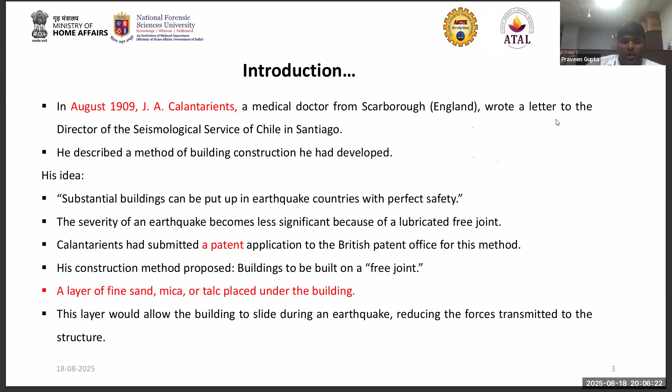So first, isolation was started earlier in 1909 by J.A. Calantarients. He was a medical doctor, but he had the thought that if a building is separated from its base, it can be more resistant to earthquakes. So he filed a patent, and it was a British patent. After filing the British patent, the idea was more elaborated, and we have incorporated isolation bearings nowadays. So this idea was by Dr. J. Calantarients.

If you look at the history of seismic isolation, in 1885 Japan had already started using wooden structures because there were a lot of casualties happening in Japan. So they started providing a sand layer over the base so they could protect their structures. Then in 1909, we saw that Dr. Calantarients provided the first patent for seismic isolation. Later on, New Zealand also worked on it, Italy also worked, and the USA also worked on base isolation.

And in 1975, New Zealand invented the lead rubber bearing, a very advanced isolation bearing that is being used nowadays. Later on, more studies were done and more isolation bearings were developed. Nowadays we also have smart isolations provided with shape memory alloys.

The objective of isolation is to protect the structure from earthquakes. But there are certain limitations. Whenever you use isolation bearings, it reduces the earthquake effect, but at the same time you have a problem of larger displacement in the building.

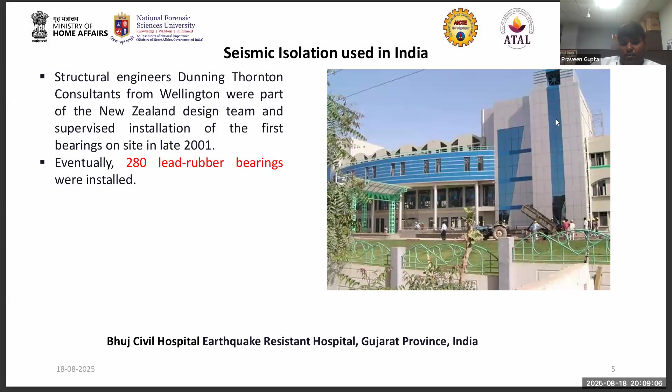First, seismic isolation bearings are now being used. The first building incorporating this after the Bhuj earthquake in Gujarat was the Bhuj Civil Hospital, in which 280 lead rubber bearings have been installed, and now it has been protected from seismic activities.

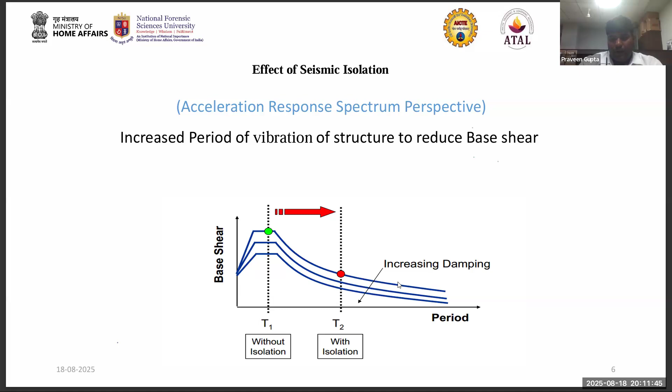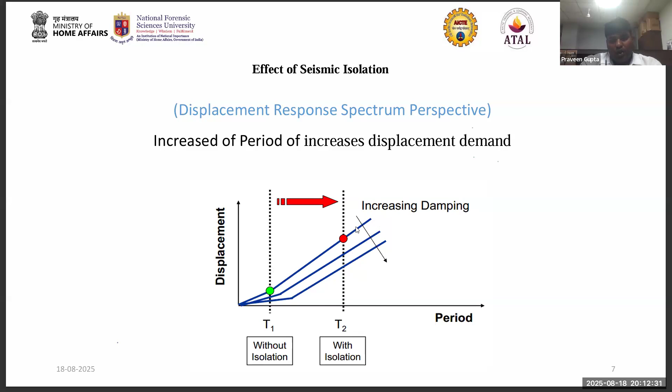If you see this diagram, from the displacement response spectrum perspective, by that time if you are increasing the time period, what is the main problem in isolation? You will have an increased value of displacement. So that is the biggest problem. How can you overcome this problem? By adding additional damping to the structure, you can reduce the increased displacement also. So by increasing the time period, you can have lesser base shear, and by adding more damping into the structure, you can reduce the displacement of the building also.

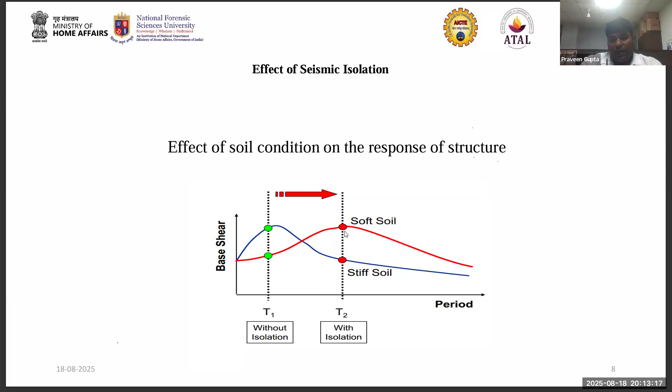If you see the effect of soil condition on the structure, consider two types of buildings, one without isolation and another with isolation. Without isolation, soft soil has lesser response, but stiff soil has more response, and soft soil has less response. But with the isolation bearing, what happens is that soft soil has a larger response than stiff soil. So this is the effect.

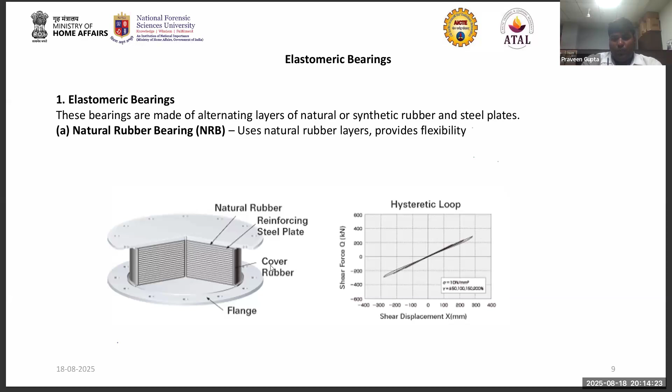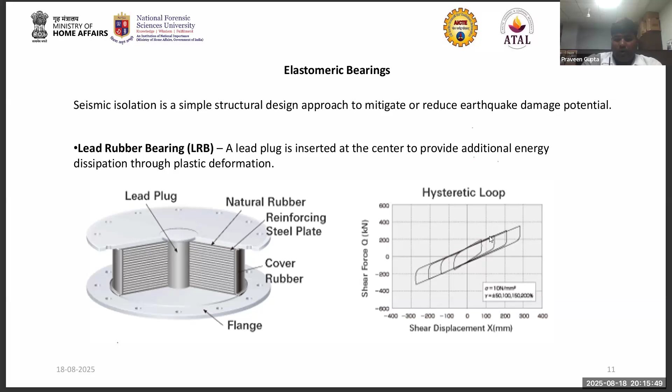Another one is the lead rubber bearing. This is also a kind of rubber bearing in which a lead plug is inserted, and this lead plug dissipates the energy, similar to the HDRB bearing. But the role of the lead plug is to dissipate the energy and provide the heating element to this material. The loop of this is a kind of bilinear behavior, and by this bilinear behavior, the bearing reduces the response of the structure.

Another type is the sliding bearings. Sliding bearings allow relative displacement between the structure and substructure through the sliding surface. Whenever you have friction, there will be some kind of energy dissipation. This particular bearing is based on Coulomb friction, in which the energy is dissipated by friction.

So what we are doing is providing different types of sliding bearings, in which we have friction material that provides the friction between two surfaces. There are four types of sliding bearing: flat sliding bearing, friction pendulum sliding bearing, double concave friction pendulum bearing, and triple concave friction bearing. This is advanced bearing, not in proper common use, but for research purposes it is widely used by many researchers.

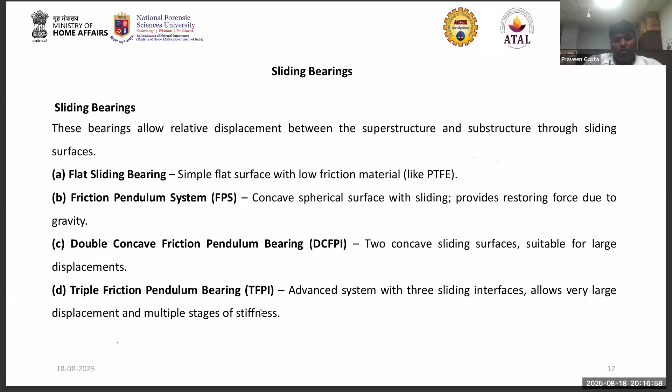If you see the flat sliding bearing, it is a simple flat surface with a low friction material like PTFE. The force deformation behavior of this bearing is a kind of bilinear and non-linear behavior, but you will find there is a permanent deformation into this bearing. When this bearing has some displacement, it does not regain its original position. That is the biggest problem of this sliding bearing - permanent deformation whenever extreme loading occurs into the structure.

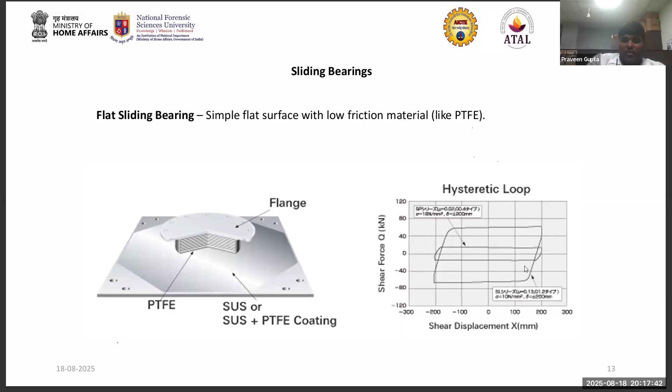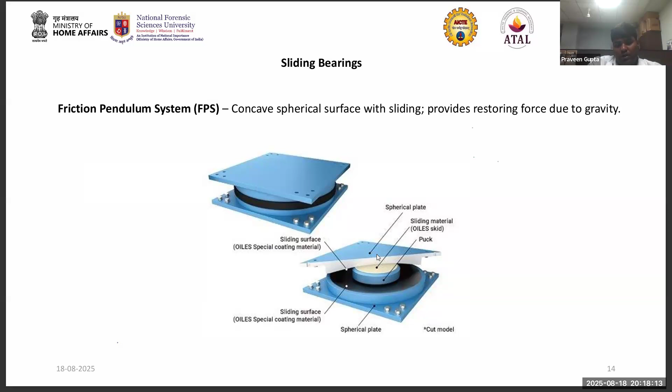That's why we have a different type, the friction pendulum system, in which the surface is supported on a pendulum, and this pendulum slides over between this ring. Due to this, it restores the deformation into the structure. This is the advantage over the simple sliding bearing - with the friction pendulum system, it regains its original position.

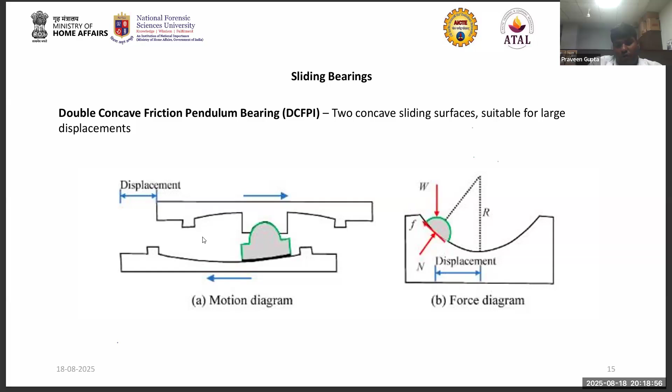If you see the double concave friction pendulum bearing, this has two concave sliding surfaces suitable for large displacement. Whenever you have extreme loading, this type of setup is prepared for our double concave surface friction pendulum bearing. This particular slider will move the pendulum, and the radius of the pendulum will be designed based on the loading. This is called the double concave friction pendulum system.

If you see the triple concave, this has an additional pendulum provided, so that it can move more displacement, and the structure can be protected. When the earthquake passes over this structure, it will regain its original position. That's why it is more advantageous than the double concave friction pendulum bearing. Triple concave has very large displacement, and it also regains its original position.

Another bearing is called the SMA bearing, an advanced type of bearing. Whenever you provide any kind of isolation bearing, as I have told you, it has deformations, and those deformations after the earthquake may be permanent. To improve that deformation, shape memory alloy can be provided, built into the isolator, so that it can improve its capacity of recentering.

The basic property of shape memory alloy is that it provides flexibility, has large energy dissipation, and the most advantageous property of SMA is the recentering ability. Whenever you provide SMA into the bearing, it has zero residual displacement. That's why SMA bearing is quite popular among researchers - it is a combination of lead rubber bearing with SMA bars or SMA wires, friction pendulum with SMA wires, and it enhances the recentering capability after strong earthquakes.

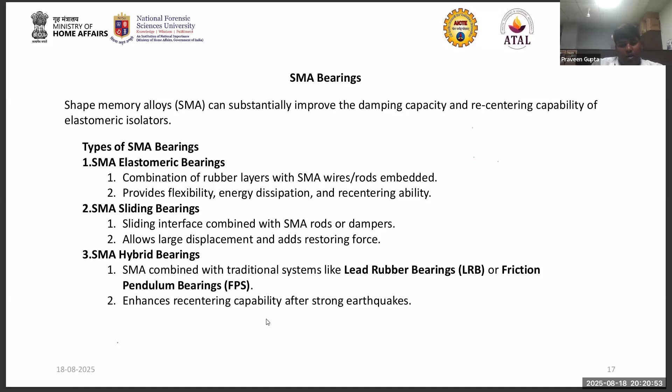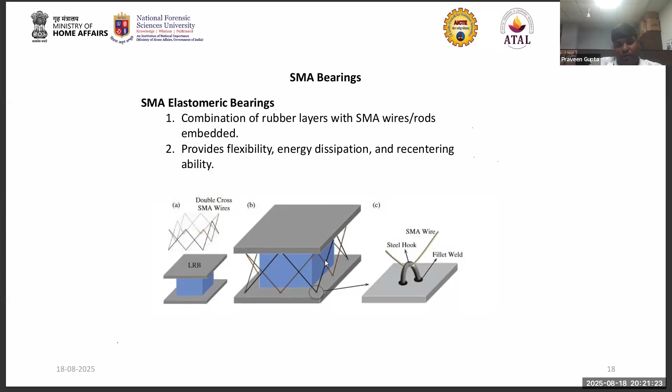If you see this particular SMA bearing, the cross wires are SMA wires that have been provided to protect it from permanent deformation. Whenever an earthquake comes, the isolation bearing will deform, but these SMA wires will activate and provide recentering properties, so that permanent deformation will not occur in this type of bearing.

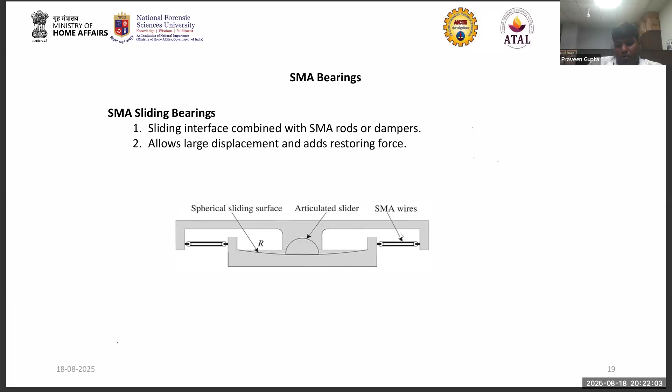This is the sliding bearing, a friction pendulum system, in which an SMA wire has been arranged such that whenever the slider moves to and fro through the pendulum radius, the SMA wire will activate and try to attract it back towards the friction pendulum system. So it will not have permanent deformation due to these wires, and it will also dissipate energy during the earthquake.

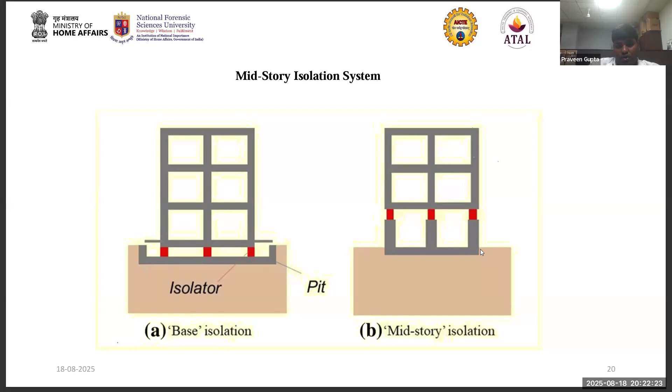Sometimes we provide the isolation bearing at the base, but you can also provide it at the mid level. Many researchers have provided base isolation, mid isolation, and have also combined base isolation and mid isolation. We will discuss this in the next slide.

Mid-story isolation is a structural engineering technique where seismic isolators are installed at an intermediate floor level, isolating the upper portion of the structure from the lower portion, allowing each part to respond differently to ground motion. During the earthquake, the lower story anchored directly to the ground experiences the majority of the energy, while the isolated upper story moves independently with significantly reduced vibrations.

So the role of isolation is to decouple the structure - the lower portion decouples from the upper portion. The upper portion moves to and fro, and the acceleration will not transmit to the upper level.

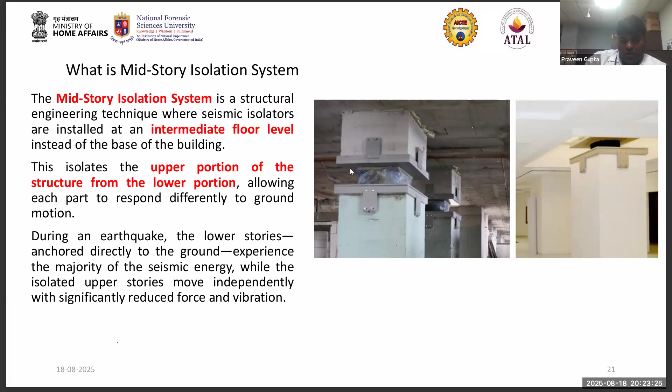This is quite useful for high damping rubber bearing. High damping rubber bearing, as we already discussed, provides additional damping in the form of viscous damping. This particular high damping rubber is made of alternate layers of steel and rubber, and it also has vertical stability - meaning whatever vertical load comes on the structure, it will resist that, and the horizontal stiffness is provided by the steel and rubber plates.

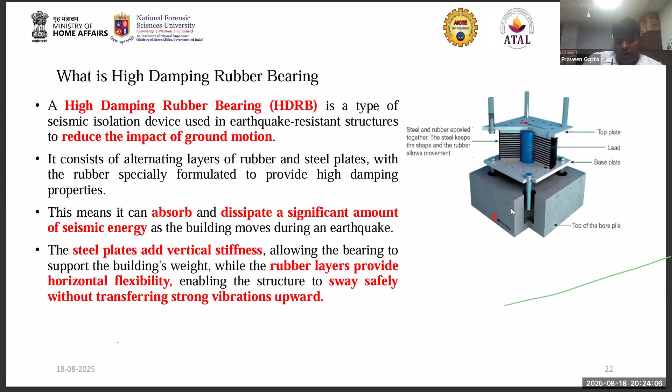If you see the modeling of high damping rubber bearing, first you have to choose the target time period of the isolation. Let's say your building is 0.5 second, or 0.8 second - for what time period of the structure you are going to design your isolation bearing. You have to decide this, because time period is nothing but the reciprocal of frequency.

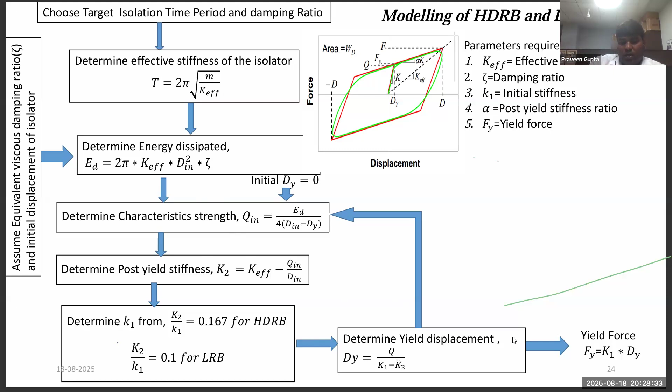Initially you have to provide dy as 0, and then you can calculate the yield displacement. This procedure will be repeated because you will not get the direct value of Fy. You have to give many iterations, until you get repeated values of the displacement and yield force. This is the iterative method to model a high damping rubber bearing and lead rubber bearing.

Similarly, this formula can be used if you are modeling the friction pendulum system. You have to determine the radius of the pendulum using T equals 2 pi under root R by G, where R is the radius of the pendulum in which your slider will be moving. This is the formula to determine R. Once you have R, you can find the K effective, which is nothing but W by R, where W is the weight on the isolator which you are going to support.

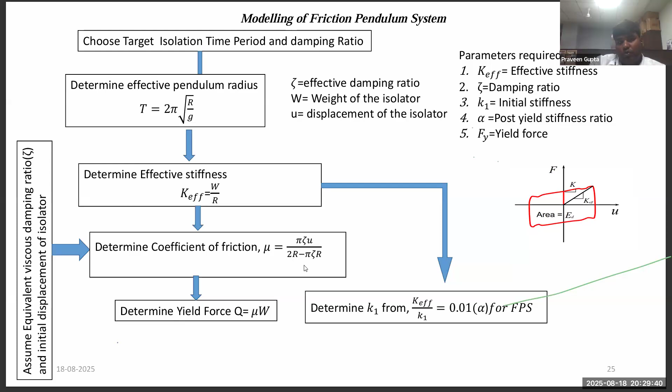You can use this particular formula to determine the coefficient of friction. After determining this, you will have the values K1, K effective, and the yield force. You can provide these in either SAP2000 or ETABS to model any kind of isolation bearing.

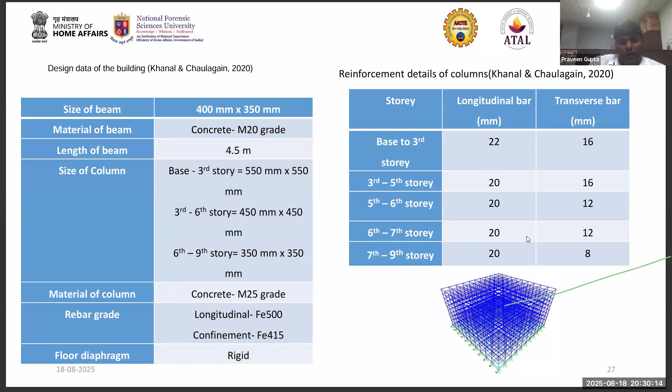This is the case study which we have done for the regular building. We have selected this particular regular building with this size of beam, this grade of concrete, length of the beam, different sizes of column provided, grade of concrete, rebar, and a rigid floor diaphragm. We have modeled this building with these amounts of reinforcement, and these ground motions have been selected and determined.

This ground motion has been selected and determined from the PEER ground motion database, a website where you can download real-time earthquake data. Whenever you perform any kind of non-linear time history analysis, you have to record the real ground motion data, and this data can be scaled to your seismic zone. Otherwise, if you want to capture the real effect of that particular ground motion, you can use unscaled ground motion. It depends on what kind of study you are doing - many researchers use unscaled ground motion, many use scaled ground motion. This kind of data can be downloaded from the PEER ground motion database.

If you look at this particular ground motion, 8 ground motions have been used in this study, and there is a variety of ground motion because these ground motions have different PGA, different PGV, and if you see this acceleration ratio, Vmax upon Amax. PGA stands for peak ground acceleration - what was the peak ground acceleration of that particular ground motion, and at that time what was the peak ground velocity. Whenever you download the ground motion, you will not have an idea what kind of ground motion we are having.

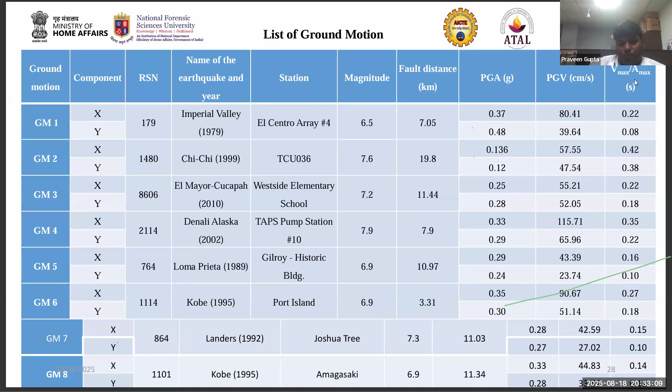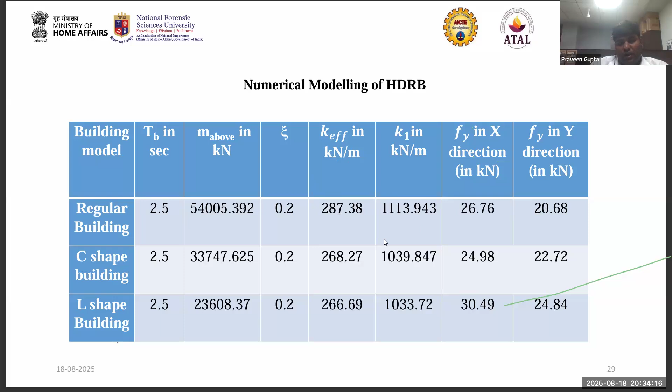Target time period 2.5 seconds. What was the mass on that particular isolator? What damping ratio have we assumed? We have assumed 20% damping, so we have taken 0.2. K effective has been determined using the formula T b equals 2 pi under root m by K effective, and K1 using that formula, and Fy using those formulas. Then we have this kind of information which we can incorporate in our software, so that we can model the isolation bearings.

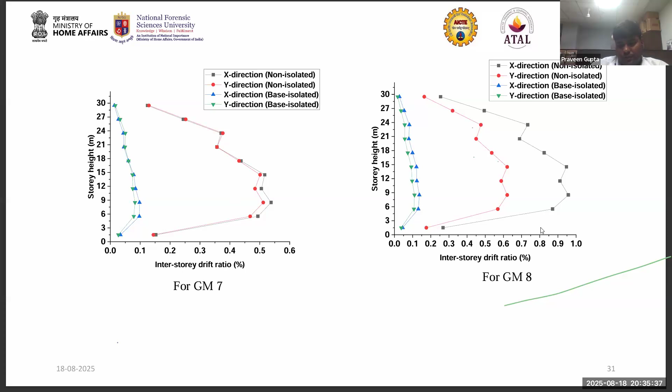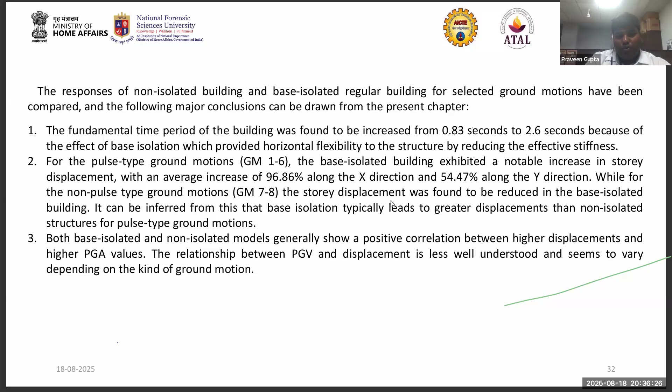In this particular study, the ground motion has been classified and it has been observed that the average increase in story displacement - story displacement, I have already told, may increase, but if you see, the drift can be significantly reduced.

In this particular study, the higher PGV value, peak ground velocity value, is generally correlated with higher inter-drift ratio in non-isolated models. However, regardless of PGV, low values of IDR were found in the base isolated model, indicating the effectiveness of base isolation in controlling inter-story drift ratio. Additionally, it was discovered that higher PGV values generally correlated with higher inter-story drift ratio in non-isolated model.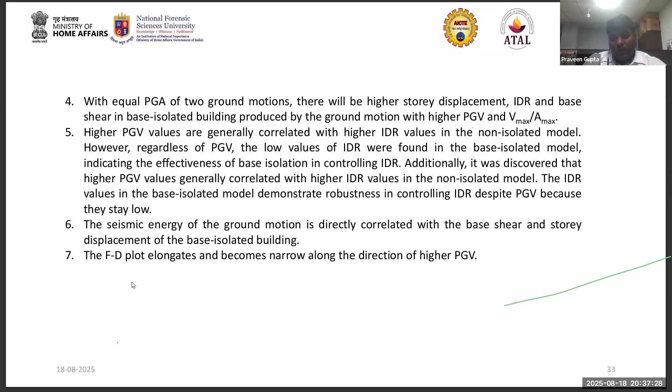The seismic energy of ground motion is directly correlated with the base shear and story displacement, and force deformation behavior is also elongated at higher PGV, because whenever you have a high pulse of velocity, your force deformation behavior means your displacement will be higher. That's why the force deformation elongates.

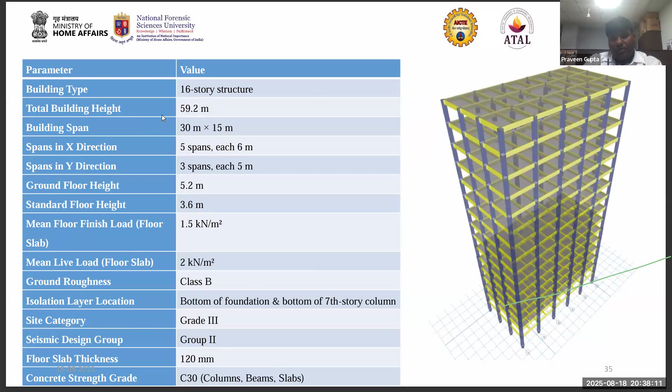So we have done another study, which is the case study for inter-story isolated building. We selected a building from literature and modeled a 16-story building. These are the properties of this particular 16-story building, categorized as a Class B building, with a grade of concrete C30, and these are the live loads and dead loads provided into the building. First the building was designed as per IS code, and then the ground motion has been applied.

This particular study has four models. The first model was without any kind of device. The second model is the base isolated model, in which we provided the isolation bearing at the base. The third model is one in which we have not provided isolation at the base, but at an intermediate level into the building. And this particular one is the new staggered isolation bearing, in which we combined base isolation as well as inter-story isolation.

So we provided four types of structures: the first without any kind of isolation, the second with base isolation, the third with mid-story isolation, and the fourth is the combination of mid-story isolation and base isolation. We investigated the effect on these types of buildings, and which combination is more suitable for protecting the structure from earthquake.

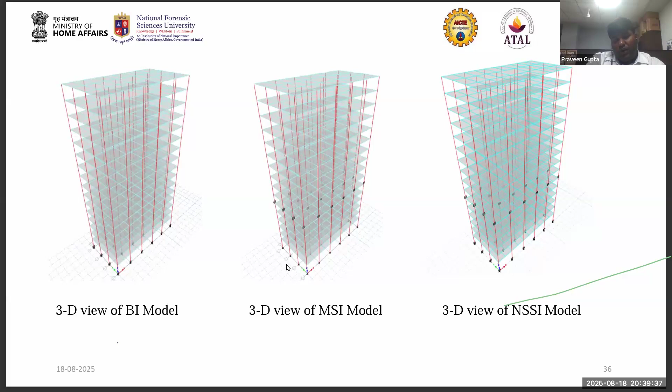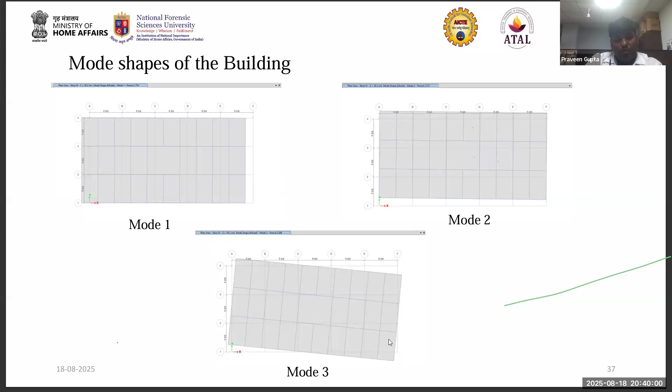When the studies were done, it was observed to have a very mixed type of response. So first we did the modal analysis to determine the mode shape of the structure. The first two modes were translational, and the third mode came as torsional. These are the mode shapes of the building obtained using modal analysis.

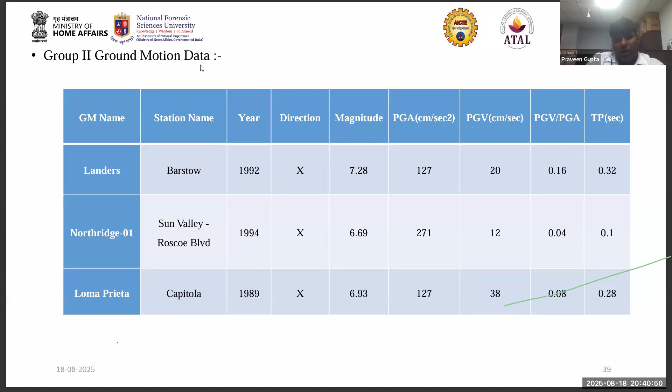These are the ground motions. We categorized our ground motions depending upon the peak ground velocity, since peak ground velocity is the main parameter which can significantly affect the response of the structure. We have two ranges: one ranging from 40 centimeters to 130 centimeters per second, and another group less than 40 centimeters per second. These ground motions were categorized as group 1 and group 2, and downloaded from the PEER database, selected from the literature based on peak ground velocity.

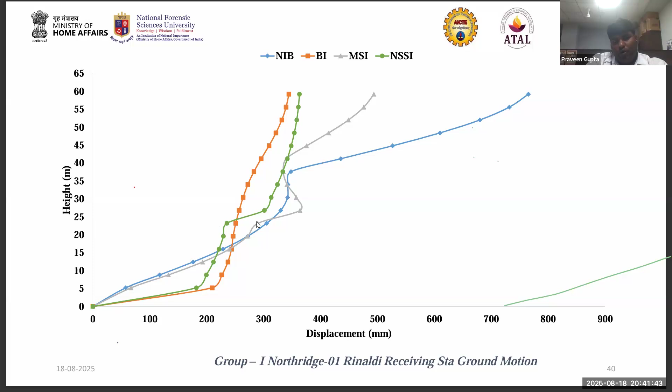If you see this particular graph, it increases suddenly, and this is because at this level the isolation has been provided, and after that the response has been reduced because the inter-story drift ratio is less.

Similarly, if you see this particular graph for drift, the drift is coming less. But at story level 25, there is a sudden displacement. This sudden displacement shows the displacement of the isolator, not the displacement of the building, because the building is connected to the isolator, so that interstory drift ratio is not considered since it is the displacement of the isolator. That's why this graph suddenly jumps - these particular values are coming from the isolation level, and this is the actual drift ratio obtained.

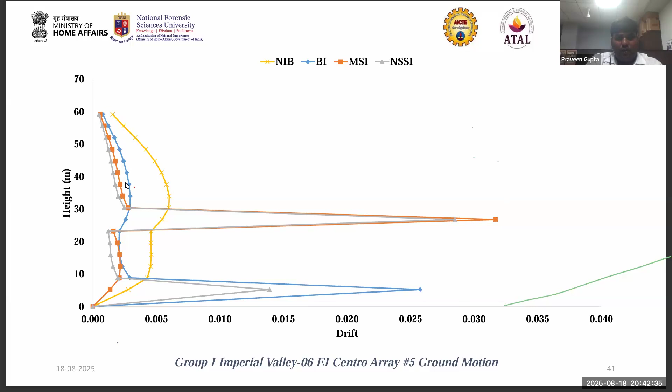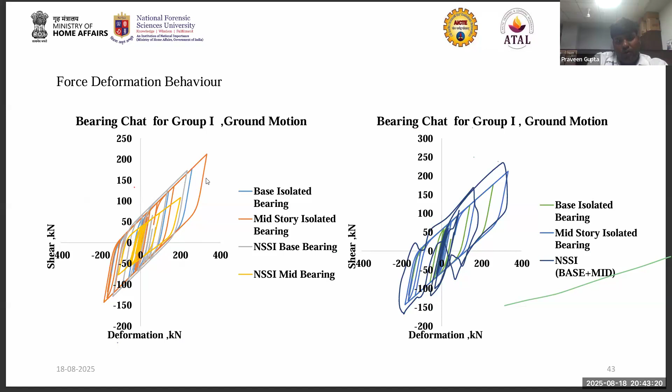It has been observed that the mid-story isolation has been found suitable for energy dissipation for this particular ground motion.

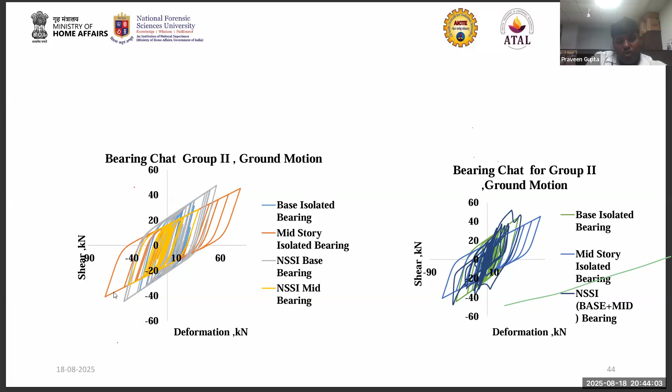Similarly, if you see the group 2 ground motions, you will see that the NSSI model has a lesser effect because we have provided two additional dampers, one at mid-story level and one at base level, so the damping has been increased. That's why the NSSI model has a lesser loop. But the orange graph shows a larger loop because the mid-story has only a single damping, so it dissipated more energy.

So if you look at this, and want to select which kind of isolation bearing or system is more suitable while deciding between base isolation or mid-story isolation, there are various parameters to consider: drift, story displacement, and energy dissipation.

So this shows mixed kinds of behavior. In some cases, story displacement and story shear come out good. But for NSSI, it shows a great effect when the ground motion has a peak ground velocity ranging from 40 centimeters per second to 130 centimeters per second. If the peak ground velocity is less than 40 centimeters, either mid-story isolation or base isolation can be used, both giving similar results. So this type of study has been done by providing isolation bearings.

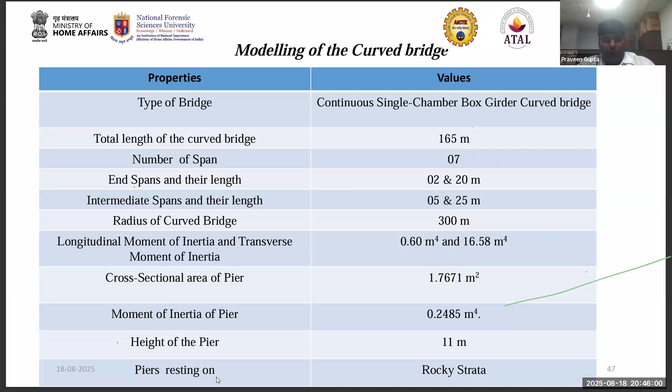Case study for isolated curved bridges. We also modeled a curved bridge with isolation bearings provided. This curved bridge was a single chamber box girder bridge with a total length of 165 meters. The total number of spans was 7, with end spans of 20 meters length, and 5 intermediate spans of 25 meters length. The radius of curvature of the bridge was 300 meters, and the moment of inertia and cross-section pier values were taken as shown. The piers were resting on rocky strata, so we took a fixed base during modeling of the curve.

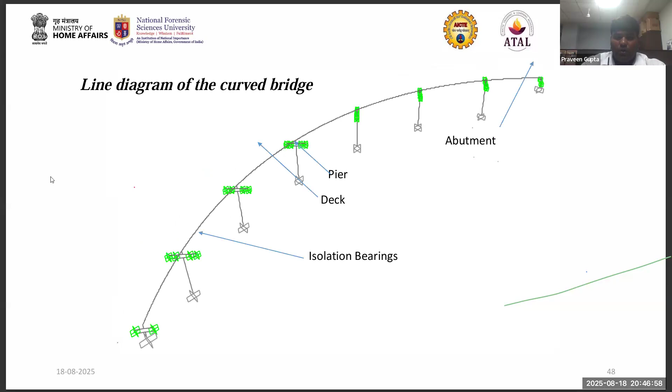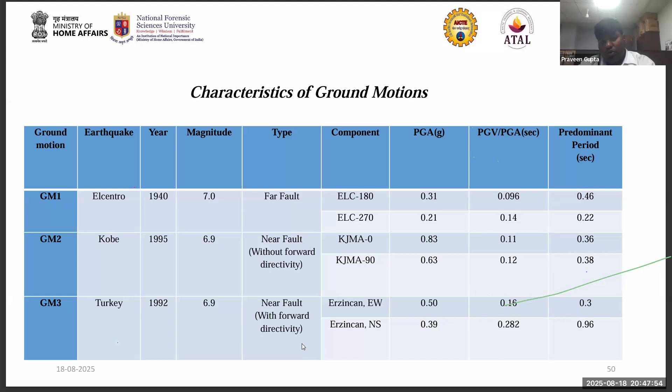That's why after a sudden decrease it started to increase, meaning there are some kind of optimizations in this particular isolation bearing. Based on that, we can have an idea that we can fix the time period and fix the damping ratio up to 20%.

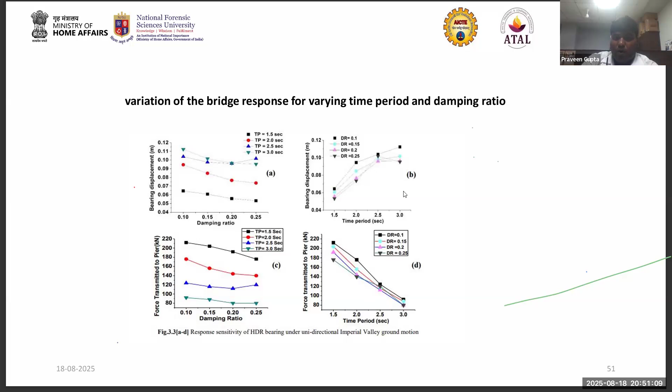So your aim is not only to protect the structure from the forces, you have to take the displacement criteria also. In order to reduce the forces, as a structural engineer, you can reduce the forces, but at the same time you have to also protect your structure from the displacement. So in that case, you have to do some optimizations while designing the isolation bearings.

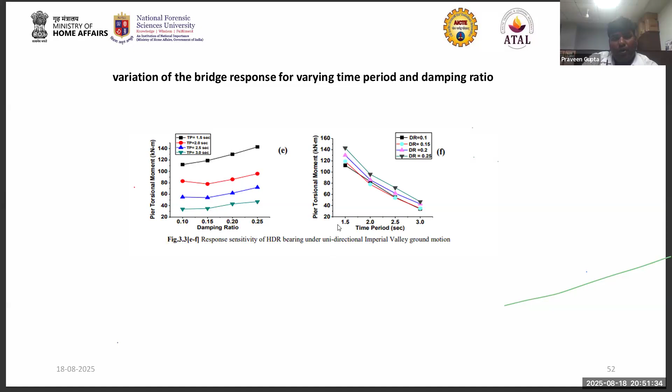We have also done this because it is a curved bridge, so there might be a torsional moment in the bridges. Torsional moment is also getting reduced up to a certain level, up to a certain damping, and thereafter it increases. So the response of the bridges certainly depends upon the time period and damping ratio of the isolation bearings.

This is the effect of bidirectional loading. If you download the ground motion, you will find six directions: you have an x direction value, a y direction value, meaning two translation values, and one vertical direction value. At the same time, you will find the rotational component of the ground motion, because we have 6 degrees of freedom, so we will have six values of the ground motion.

But how you are going to apply the ground motion is very important - whether you are going to provide unidirectional, bidirectional, or tridirectional ground motion. Our code has already given the idea that if you are doing any kind of advanced analysis and the structure is more vulnerable to other ground motion directions also, you can provide bidirectional and tridirectional ground motions also.

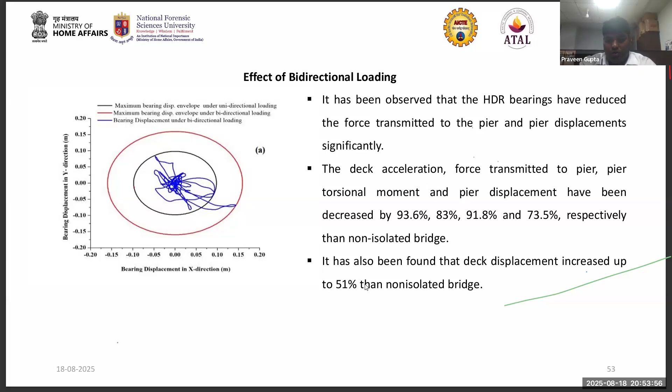And if you see, the high damping rubber bearing significantly reduces the force transmitted to the pier, and the deck displacement has been increased, as we have already discussed. If you are providing the isolator, there will be a problem of increase in the deck displacement or inter-story displacement in the buildings.

We have this code, seismic isolation, as per IS 1893. It is a very small code, around 10 to 8 pages, which I have already covered. These equations have been given over there, and you can refer to this particular code whenever you design any kind of isolation bearings.

While designing lead rubber bearings, there is a limitation of this particular code, in that it only covers lead rubber bearing or high damping rubber bearing. Meaning, you can design only rubber bearing, and you can model this particular bearing as a bilinear model, which I have already covered in the earlier slide.

Some software demonstration we can do over here, and these were the references.

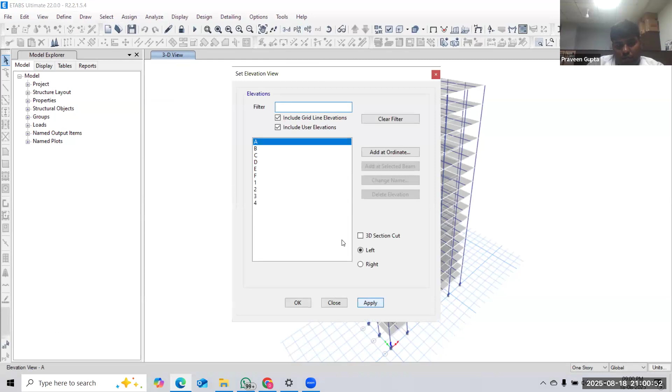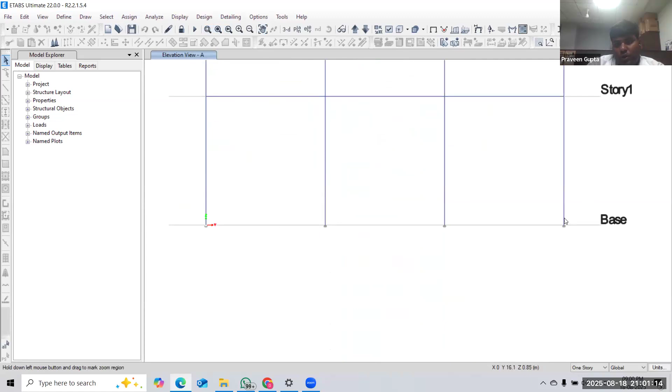So this is the joint base, and here we can have an isolation bearing. So here we can provide the joint, and we can provide the isolation bearing.

Okay, so first you have to determine the self weight of the building. Self weight of the building includes dead load and some percentage of live load that you have to incorporate. So how do you calculate the dead load and live load?

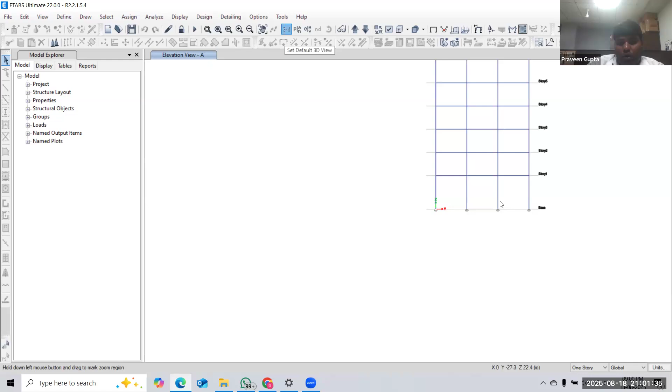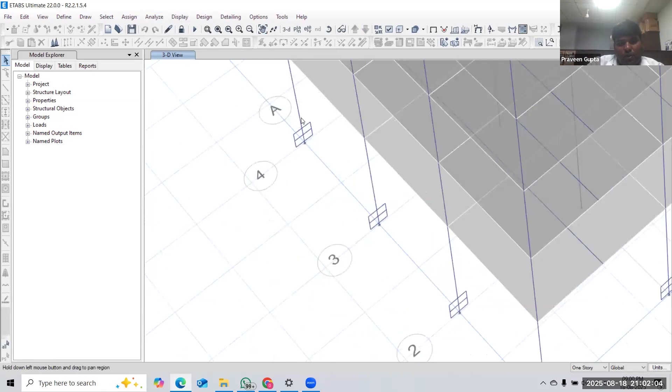First, you have to provide the simply supported joint over all the supports, and do the simple analysis. If you go to the set load, you have to only perform the dead load analysis, or you can have a combination of dead load plus live load. Based on that, whatever reactions are coming, you can calculate those reactions in z direction, and this will be the vertical load coming on the structure.

Once you calculate the load on the structure, you have an idea that this is the mass of the structure. Then you can calculate the value of K effective. We have discussed T equals 2 pi under root m by k - this is the simple formula by which you can calculate the K effective.

So K effective determines which kind of isolator we are going to provide. In order to do that, we have to determine the value of K effective, which can be determined by T equals 2 pi under root m by K, where T is the assumed value - meaning you are targeting a 2.5 second or 3-second building. So by using that formula, you can determine the value of K effective, since T is known to you and M is known to you.

If you are putting the value of M, what is M? If you are providing the fixed support, you will have an idea what kind of vertical load is coming on the structure, and that will be in kilonewton. Then if you divide it by g, you will get the mass of the building. Then you can calculate the value of K effective, and otherwise you can directly put the value of w, which is coming in kilonewton. Then you will have an idea about K effective. After getting K effective, you can shift the time period of the structure.

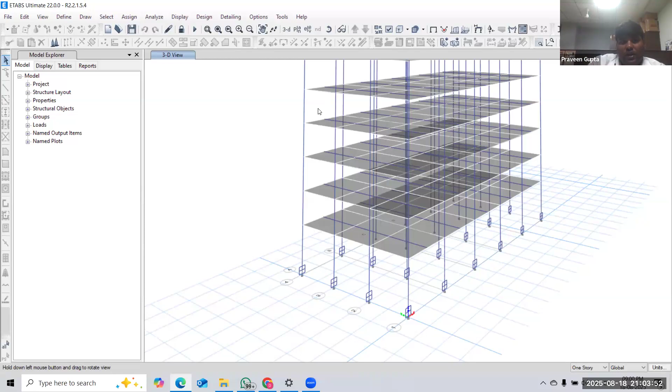So this is the second step, and you have calculated the K effective. Now if you put this particular K effective, you will have an idea that my building has shifted from 0.8 second to, let us say, 2.5 second. So how are you going to provide this K effective? First you have to assign this particular isolation bearing into the system.

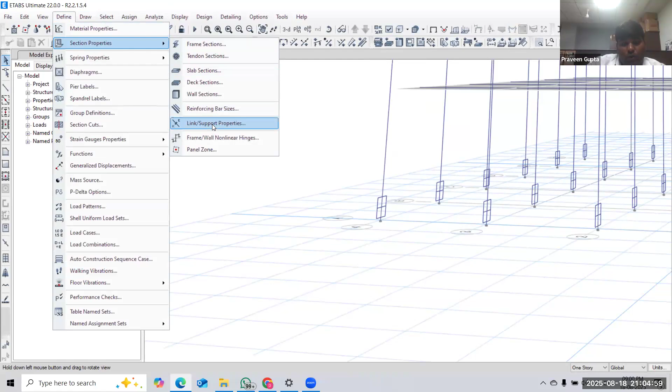So if you see, we have already provided the isolation bearing over here. If you click on this, this is my link property. If you click here, this is my isolation bearing in which I have provided HDRB4. If I would like to see the values of this, I will go for Define Section Property, and in section property, link support property. The link support property, basically we provide the link as an isolator. If you click on this link support property, there is a high damping rubber bearing provided over here.

Let us say I'm just adding one new property, for example. So how are we going to fix this? If you see here, there are so many devices available: damper, damper bilinear, damper friction, spring gap, hook, multilinear elastic, and so on. So which one are we going to select? Either you can use the high damping rubber bearing isolator directly, or you can use the Plastic Wen. Plastic Wen is the idea in which you have already done the bilinear modeling.

So if you see the directions, the isolation bearing has three directions: U1, U2, U3. U1 is the vertical direction, U2 and U3 are the horizontal directions. So what is this stiffness? This stiffness is nothing but the flexibility of the isolation bearing, flexibility of your building. So in which direction are you going to provide the flexibility? This is not your vertical stiffness, this is your horizontal stiffness. So you have to click on the directional property U2 and U3.

If you click here, you will find data: effective damping and effective stiffness. So effective stiffness is what you have calculated using K, T equals 2 pi under root M by K. K is the K effective, which you will put over here. And damping you have to assume - let's say you want to do many iterations, so first you take 10% damping, 15% damping, 20% damping, and so on. You can put your damping ratio here.

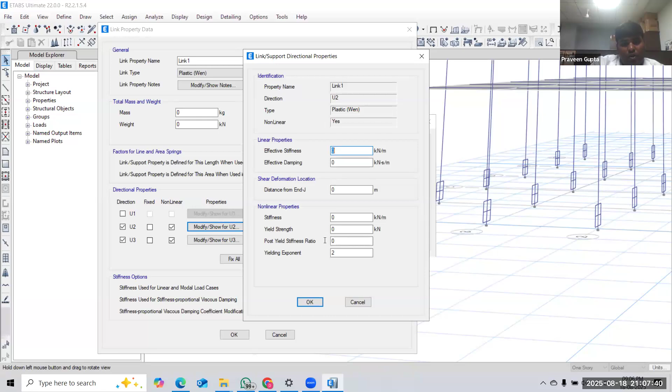After putting this, you will have the property in all the directions. The other directions you have to keep fixed. So you have to fix all the other directions, because I am providing my flexibility in the horizontal directions. Horizontal can be X direction, horizontal can be Y direction. So this directional property is very important while designing any kind of isolator.

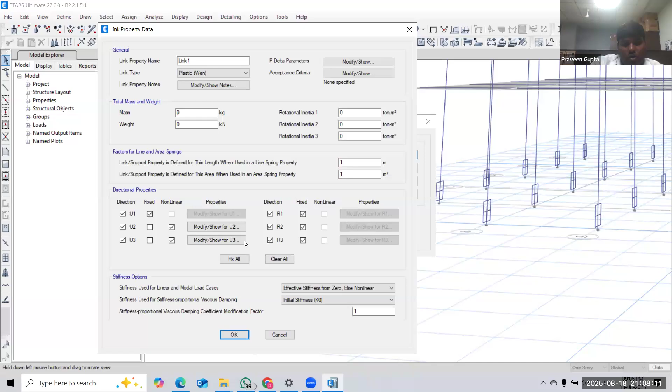So you have to put this - if you see my properties, I have already provided over here, so you can check. I have provided my effective stiffness 302.025, which I have calculated from the formula T equal to 2 pi under root m by K. I have assumed the damping ratio 0.15. The stiffness I have calculated, that is your initial stiffness K1, and the yield strength is K1 into dy, which I have calculated from the equations we discussed, and this is the post yield stiffness ratio. Here you can put the post yield stiffness ratio 0.167 or 0.1, and then you will have these properties. This is called the nonlinear property of the system.

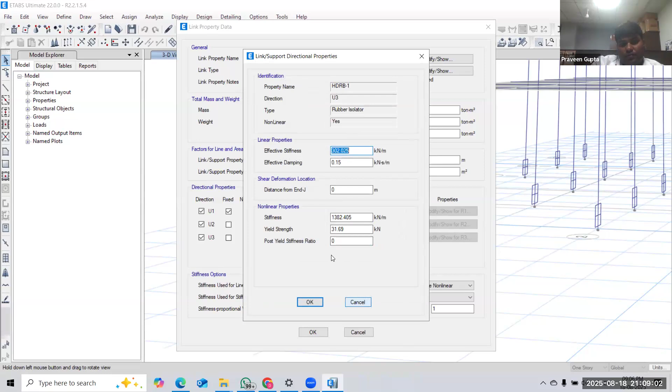Okay, so this is the high damping rubber bearing. Once you have provided the high damping rubber bearing, then if you want to draw the links, once you define it, you will have this kind of window, and here you will find your defined properties HDRB1, HDRB2, and then you can select and provide the high damping rubber bearing.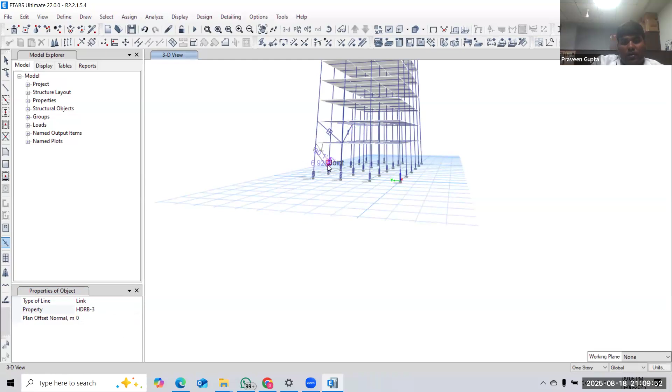Let us say I'm just joining these two joints. So you can see this bearing has been provided. I can draw anywhere, meaning wherever you want to provide this kind of link, you can do so. So you will see here, you are able to see that we have provided the high damping rubber bearing.

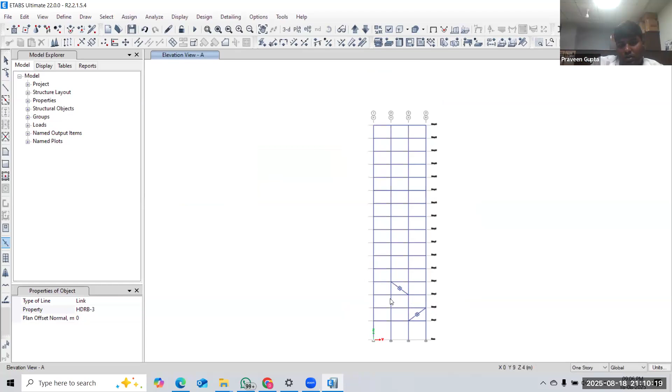But we cannot provide it in diagonal directions. We have to provide the damping in vertical directions, because the isolation bearing is provided under the superstructure. So I'm just showing how, if you are selecting this link, it can be drawn, and this is your isolation bearing, as you can see.

And here, in this particular model, we have already provided the high damping rubber bearing at this end. If you see the 3D plane, you will find I have already provided it. This is at the base. So after providing this property, you have to define the function.

After defining this property, you should define the time history analysis, so the time history functions. Those functions you can download from the PEER ground motion database, and you can provide this property over here. And if you want to see how this ground motion will look like, we can take any kind of ground motion.

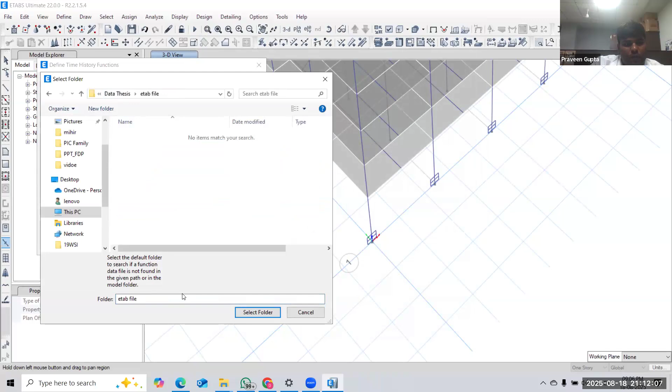I think the ground motions are not available over here, but I can tell you the procedure. The time history function can be defined from file; you can choose any function over here, and you can select your ground motions here. Then once you click, it will be shown here.

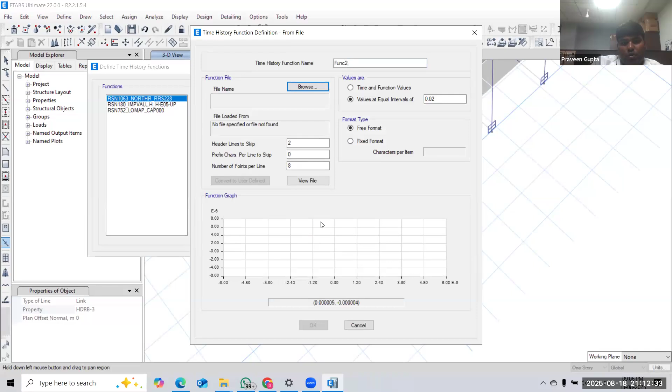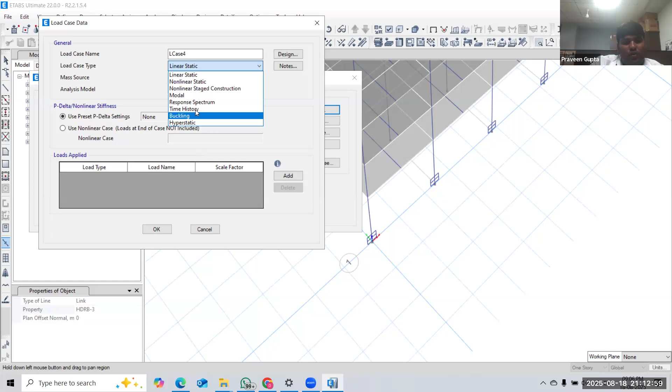After defining the ground motion, you will have to define the load cases. That load case will come under 'add new load cases', and here you will have the time history function. In load cases, you have linear static, linear non-linear static, and non-linear stage construction, in which you have to select the time history function.

In the time history function, if you define, you will find some acceleration u1, u2, u3, and this kind of ground motions, already defined. Here you have to put the scale factor if you are using ETABS. So here you have to put 9810.

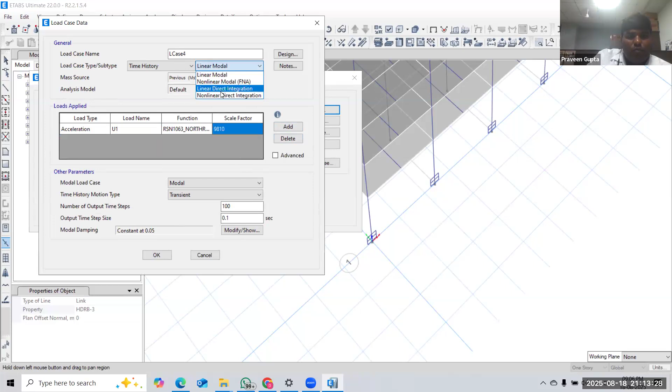If you are using SAP2000, then you have to put 9.81, and here you have to put non-linear direct integration. So there might be some parameters.

If you are providing unidirectional, you have to add only the u1 direction. If you are providing bidirectional, you have to simultaneously pick the u2 direction also. And here you can put the ground motions and scale factor 9810, and here the output step is the number of steps.

And for damping, you have to provide the specific damping and time period, which you can get from the time period: first mode time period, second mode time period. Here you can provide the damping ratios, so you can put the value.

If you see the time integration method, there are different methods: Newmark beta method, Wilson method, collocation method, Hilber-Hughes-Taylor alpha method. Let us say if you are using the default method, for convergence you have to provide minus 0.33 so that your time history will converge.

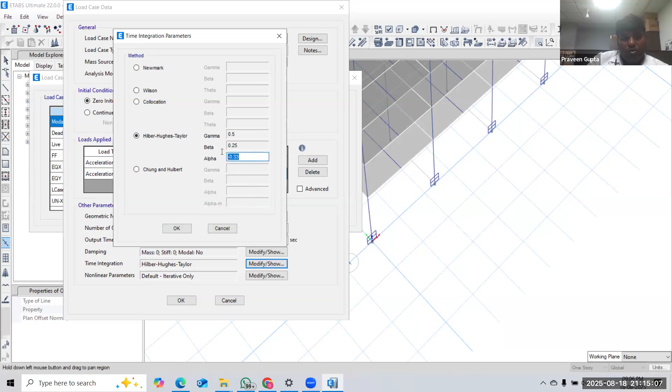Otherwise, your entire time history may not run and the program will fail. So for convergence, you have to provide this alpha value of minus 0.33, and the non-linear time period parameter you can take as default. Okay, and then you can run the cases.

So we have already run these cases, and after analyzing you can go for the analyze case, and whatever load cases you have made, you will find them here in the load cases history.

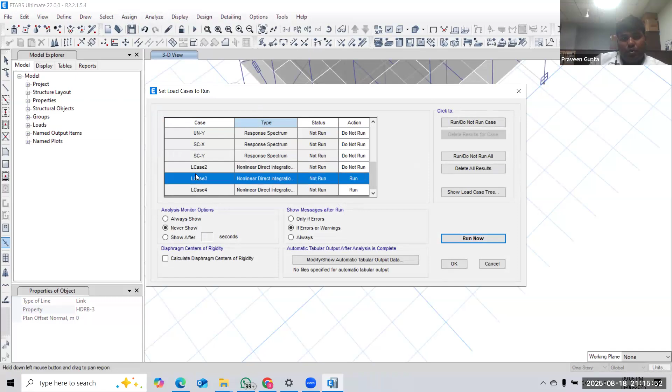This is the load case we have created. You will find load case 2, load case 3, load case 4, and then you will run them. It will take time to run the analysis, and then you will be able to find the drift and displacement of this particular building.

For analyzing, it will take several minutes while performing the nonlinear time history analysis. For the result you can find it over here in the story response plot, where you can find the drift, displacement, and all these.

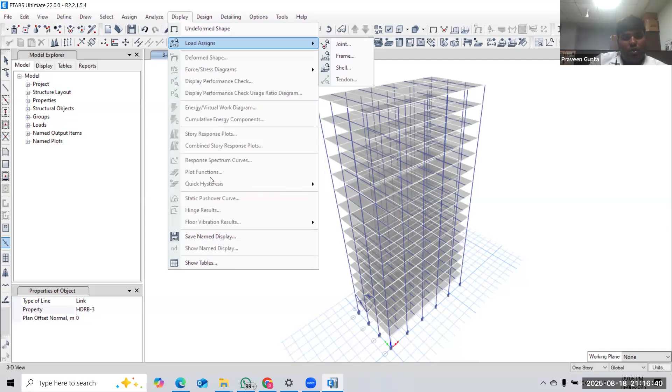If you want to see the behavior of the bearing, in this function quick hysteresis you will find the behavior of the bearings. So here you can find the results. It will take time to analyze the structure, so if you have any doubt, you can ask me.

Yes, please raise your hand if you have any question, please ask. You can also ask later on if you have my email ID and contact number, you can also contact for any clarification.

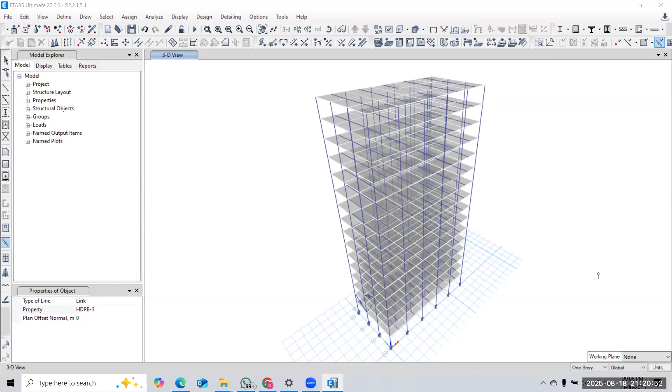Okay sir, thank you. Yes, any other question? Thanks Praveen sir. This session is very informative and we learned many things from you, and you have shared your email ID and contact number, so if anyone has any doubt, they can ask you later on also. Yes, anytime.